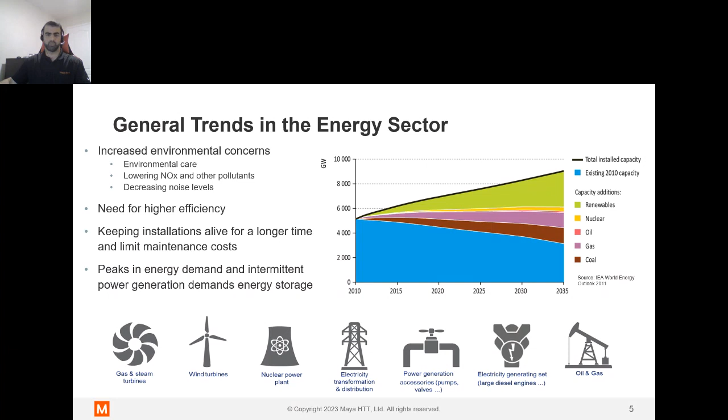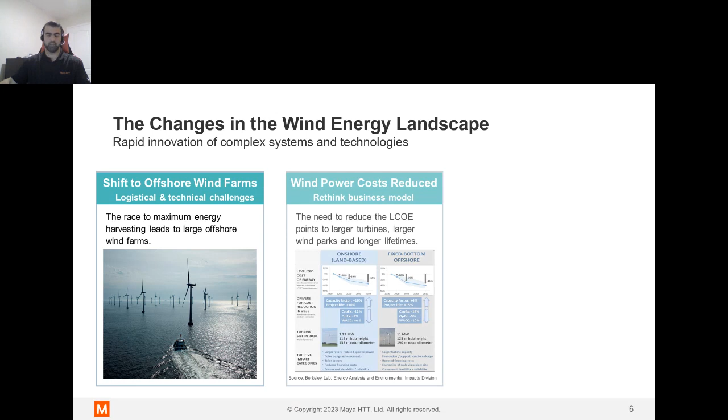So let's look at what are the latest trends in the wind energy landscape. There is a clear shift toward offshore wind parks. The logistics and the investments are heavier, but the availability of constant wind speed is much greater than on land. And also there is high pressure on the cost of wind farms, since at the latest auction, for example, the offshore wind farms are granted without any subsidy. So the return of investment must be guaranteed by low capex and opex. And lastly, consolidation is taking place.

The four biggest wind turbine makers, Vestas, Siemens Gamesa, Goldwind, and GE, had in 2017 a market share of 54%, and the competition is increasing. The aim is by advanced designs, but also by clever fleet management, like optimized maintenance schedules or simply less maintenance, but by increased reliability of the installation to attract more businesses.

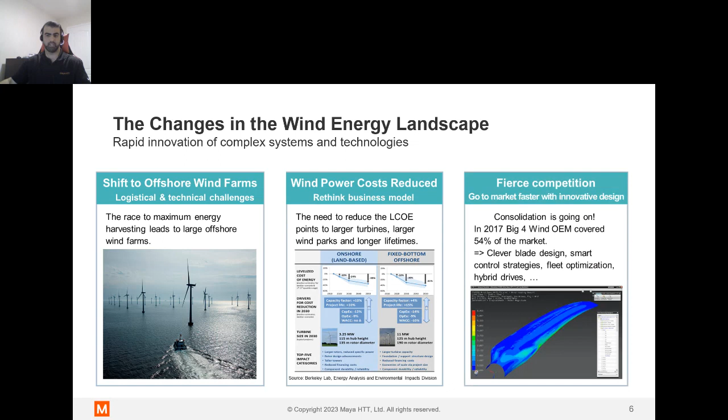So let's see how we can enhance our design dependability and increase the efficiency. One of the approaches is to go toward digital twin through digital transformation. You may have heard digital twins many times with very different or the same definition. So what exactly do we mean by digital transformation?

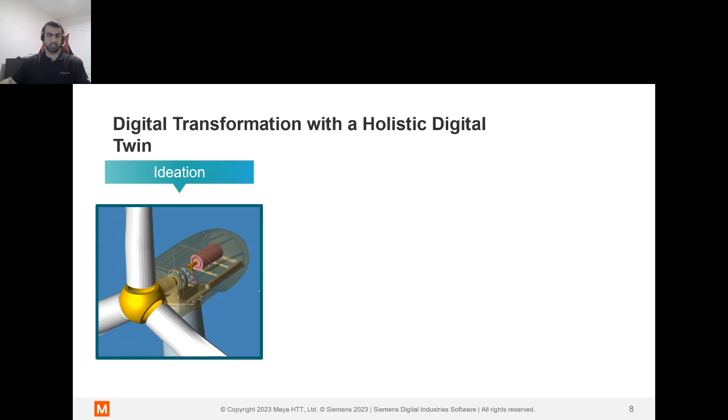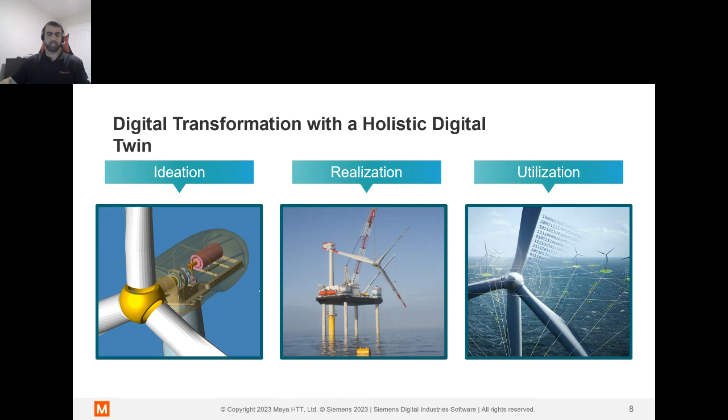It means digitally capturing all phases of your product development process, from the ideation phase with a product that helps you digitally define and improve your design and analyze its performance, to the realization phase with virtual production to digitize the manufacturing process of your product and anything used to produce it. And the last thing is the utilization phase, where you digitally capture and relate all the elements of your product from design to actual product in use to ensure it performs as required throughout its life.

So creating this holistic digital twin will help you in wind turbine development. How can it help you? It helps you increase the safety and reliability of your wind turbine, and also it addresses the speed and performance issues that you may have, and more accurate simulations help you predict with higher accuracy and precision what's the life of the product that you have, for example.

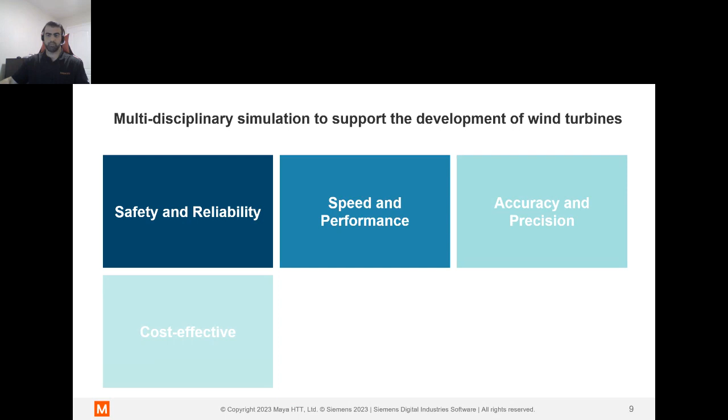And you can do all these steps in a cost effective manner because you're not producing the actual prototypes many times to do this development. And also you can benefit from these digital twins for your certification process, and you can address the on and offshore challenges that you might be facing.

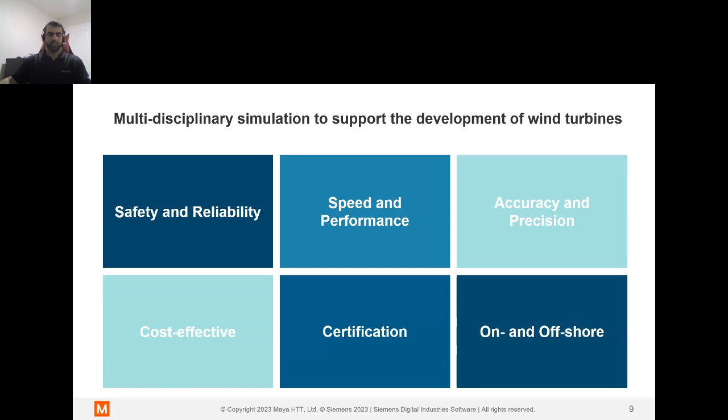Let's look at the extent of simulation technology that can help us achieve these goals. In the SimCenter portfolio from Siemens and Maya expertise, we have software that can address fluid dynamics, structural mechanics like composites, dynamics, static analysis, acoustics, motions, electromagnetics, and many other things. But we don't stop here. We can combine many of these together, for example do fluid solid interactions, aeroacoustics, or vibroacoustics. We have the expertise to combine these software to create a more holistic and comprehensive digital twin of your system.

Some of these models and examples are like here. We are doing models of bed plate, actuators, or we can look at load computation and use that as a base for certification. We can model the gearbox, resonance detection, or crack propagation, look at offshore performance of the wind turbine, or structural strength and durability.

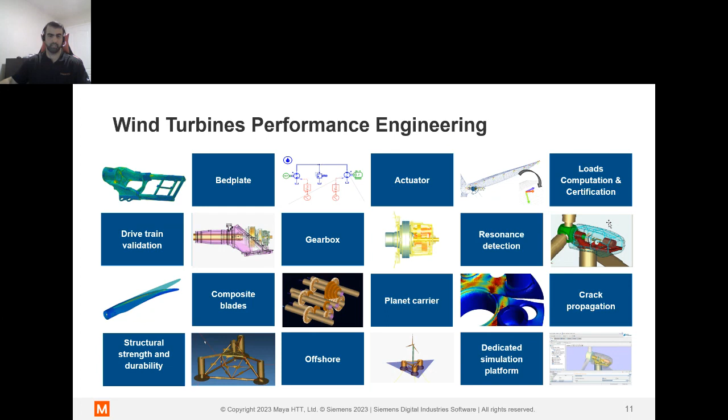Let's look at what is included in wind energy performance engineering. You have to look at aerodynamic performance, turbine engineering by itself, and management, reliability, and system performance. By looking at this, we can improve efficiency, ensure we have a durable product, and explore blade and wind farm improvement.

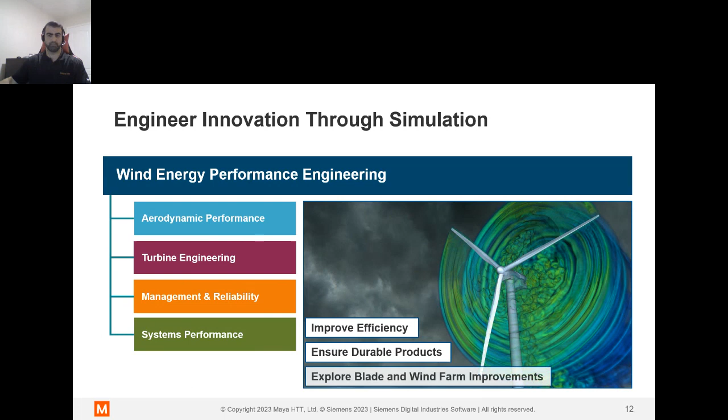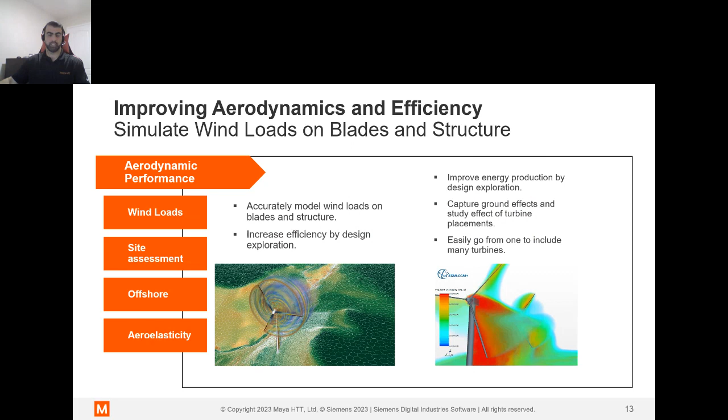Let's look at improving aerodynamic efficiency. How can we do that? By creating accurate models in CFD, you can accurately model wind loads on blades and structures. You can increase efficiency by design exploration and optimization study on the wind turbine itself, and improve energy production by design exploration on the entire wind farm. You can capture ground effects and study effects of turbine placement, and easily go from one to many turbines to see the effect of each on the others.

We can go even further. We can utilize the mesh motion in the software and our expertise to simulate forces on the wind turbine offshore, including forces from water and waves, to model accurately how the wind turbine platform works all together. It's not just a blade, it's the entire system that should work together. We can do fluid solid interaction to ensure stable operation, because under loading these wind turbines can deflect and it affects their performance. We can simulate the unsteady behavior of the blades, different mode shapes, to prevent accidents and ensure operation.

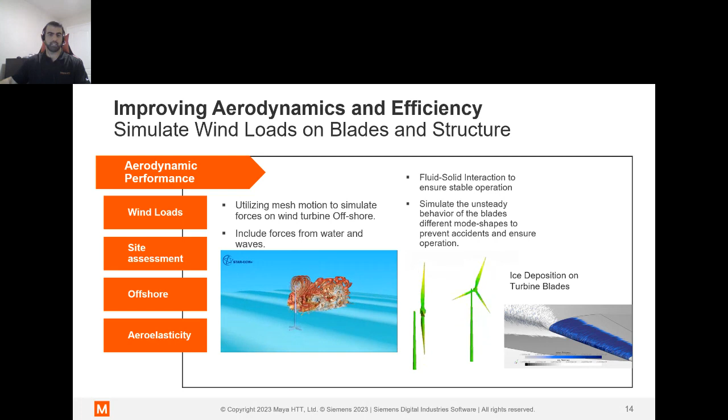To increase reliability, you can go one step further. If you're installing these wind turbines in cold climate, you can do ice deposition on turbine blades and see how much you lose in terms of power generation.

A wind turbine is an entire system and is designed as such. More than ever, the global Siemens philosophy offers an integrated and complete environment for balancing multidiscipline aspects at every level, from initial design to validation and certification of the machine. With an integrated platform like what we have access to through Siemens and our expertise, you can do acoustic behavior, structural integration, durability and reliability, and system performance analysis.

You can go through a virtual prototyping process where you define the objectives and requirements, then go through this process multiple times. After finishing virtual prototyping, you go into virtual and physical testing, combined with validation and certification. When you have a validated result, you can go back to virtual prototyping and improve your entire system integrity by modeling a system level simulation.

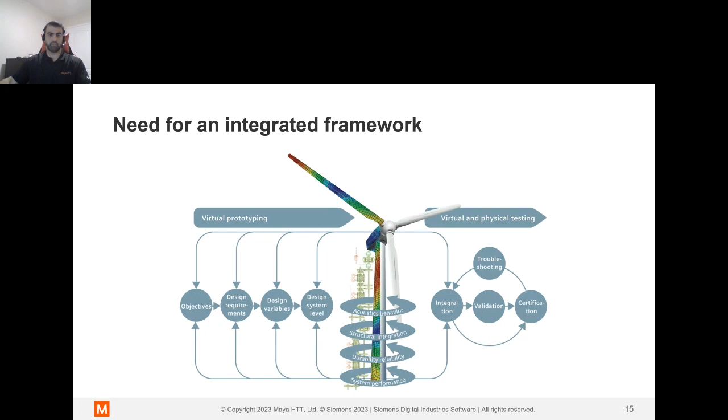One example of this: here we have a model of a hydraulic lubrication subsystem, like all the different subsystems of a wind turbine. We can do hydraulic lubrication, model the electronics, electrics, transmission, thermal control, and by applying wind speed profiles, extreme condition scenarios, safety procedures, or realistic cycles, we can predict energy and efficiency analysis, thermal management, and NVH analysis.

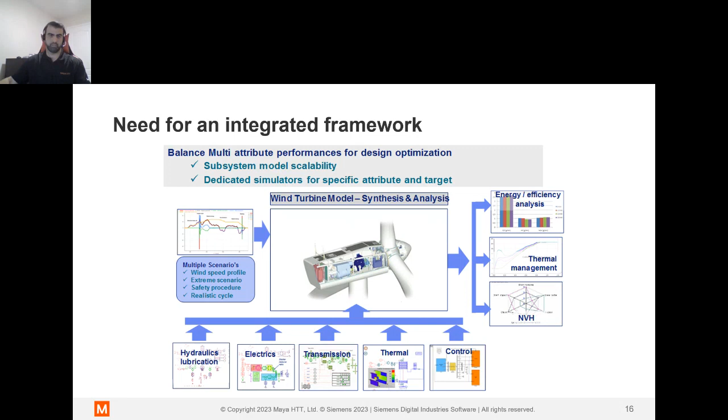The base of this is an integrated framework that you can work with, which we offer through the Siemens portfolio. The second process is digitizing the process of product development and certification. So we did our digital twin, we created a virtual product. Now what's the next step?

So now let's talk about how product lifecycle management software, or PLM, can help you speed and streamline product introduction. Teamcenter is a digital thread backbone that connects your whole product lifecycle, connecting all the information and processes.

First, you need to implement a data management system that connects your information from design through to manufacturing. This will enhance global collaboration across design domains and the whole business.

With a data management system in place, your teams can better keep track of requirements. They can manage the data across the different bills of material and accurately track different configurations. PLM makes the connection with the entire value chain, from product development and manufacturing to delivery, covering the complete product lifecycle, including suppliers.

So that's what Teamcenter can do to make it more efficient to do the certification process, to go from ideation to manufacturing phase and beyond. But we can go one step beyond that.

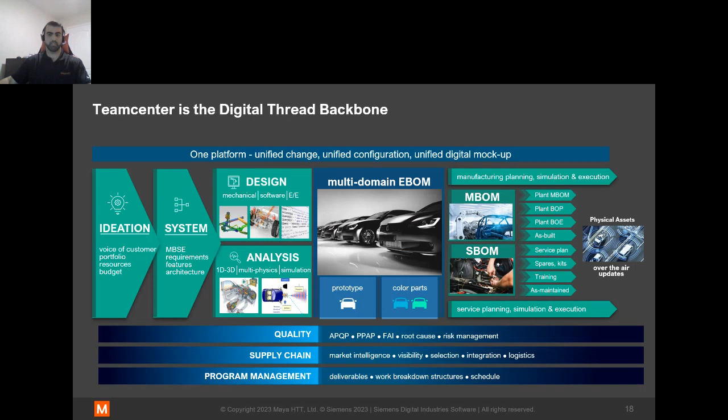The other one is you can put model-based system engineering on top of all this, which provides you with the integrated program planning and execution. So the evolution of PLM continues with additional information and teams concurrently connected to a digital twin.

The integrated program planning and execution connects the program event gates with the schedules of execution. And in a product, for example in a product definition phase, the systems engineering delivers a methodology to ensure you build the right product that meets the expectation of the target stakeholder.

Going further, the connected engineering objective is to improve visibility across product development domains and utilize real-time collaboration with intuitive authoring and linking to quickly identify defects, determine the impact, and resolve issues in the most complex systems. And it can go further.

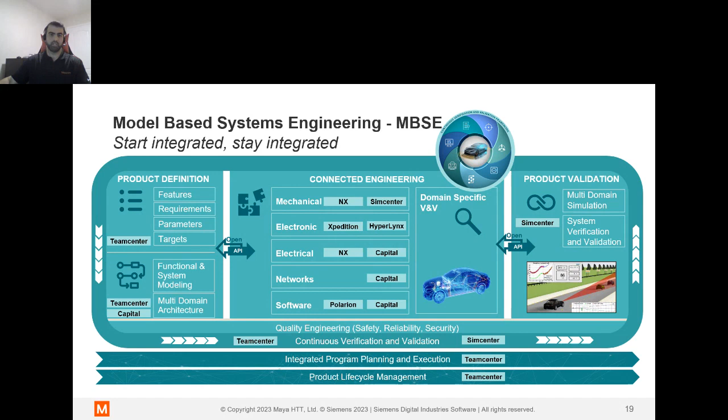It can connect all this together with product validation. So you get real-time data from product validation and you can see the affected parties or stakeholders in your design process, from the requirements to connected engineering. And you can see some of the product names beside each of these connected engineering areas in the Simcenter portfolio.

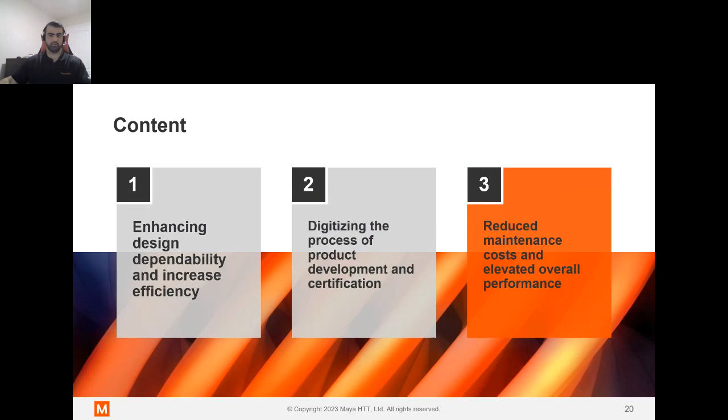The last thing I'd like to touch on is reducing maintenance costs and elevating overall performance. So far, using simulation, MBSE, and Teamcenter, we came up with the holistic digital twin. So the next step is to benefit from these digital twins.

Combining models and operational data is a core of a digital twin. In this section, I'm going to give you an example of this usage. There are basically two approaches that you can do for reducing maintenance costs.

You can have a digital twin that is data driven, or you can have a digital twin that is model driven. In the case of data driven, the specific details of a wind turbine are ignored or not known. Based upon the time histories of operational data only, one identifies trends which are representative of potential damages.

Artificial intelligence plays a key role in this one, and you can predict the next failures, etc. But this may not be valid in failure modes, because nobody likes to have a wind turbine fail and cost them millions or billions of dollars, only to have a predictive model later.

So the other approach is model driven. Here the core is turbine detailed information. This can be obtained from the models that were developed during the virtual prototyping phase, and they were validated with a limited amount of dedicated measurement in a turbine.

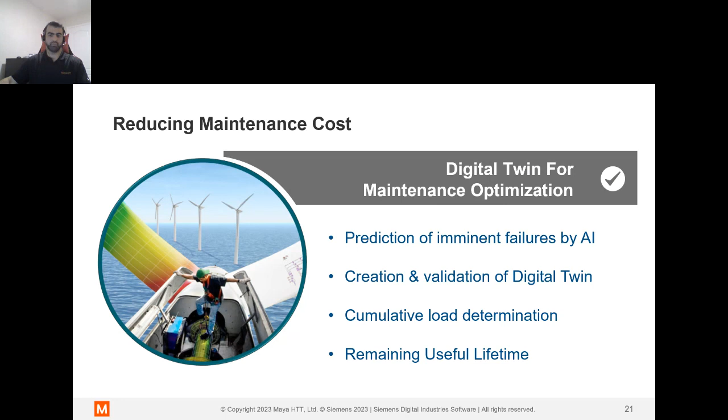Then the operation data is used to extract the equivalent cumulative loads for critical components. If the design assumptions for these components are known, then you can do the aging analysis as well and calculate the remaining useful lifetime of these wind turbines.

We have many other examples where we used outlier detection or anomaly detection to be able to predict where maintenance is needed, or to prevent any catastrophic failures in the design because of a non-operational condition or the system working in a bad condition.

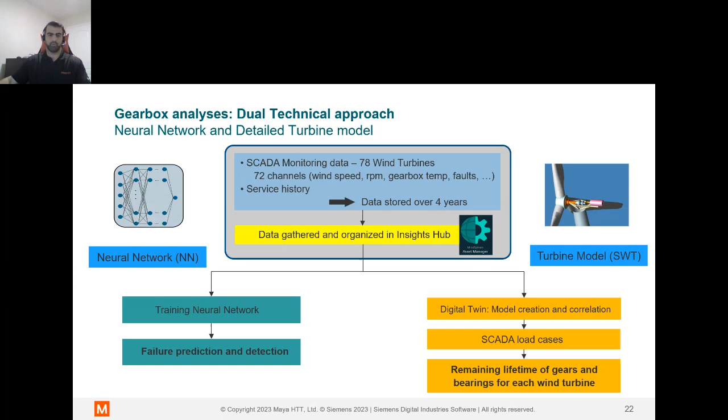So that's about it. I just scratched the surface on all of these topics. Each of them has their own world—you can dive a lot deeper into each of these, and I will be happy to answer any questions you may have on these topics.